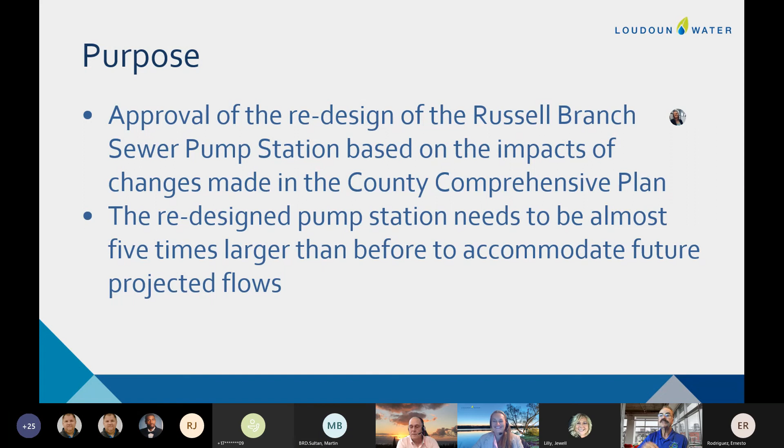Is there a question? Yeah, Kathleen, just to move things along, I think Marty and I and Mr. Bonfils have had, just kind of hit the high points, if you don't mind. Sure. I'm only saying this because I've got a meeting at 9 o'clock and I just want to make sure I get through most of this stuff. I appreciate it. Sure. Yes, and I agree. We read through your material. Thank you very much. Easy enough. All right. Then I'll try to move through this quickly.

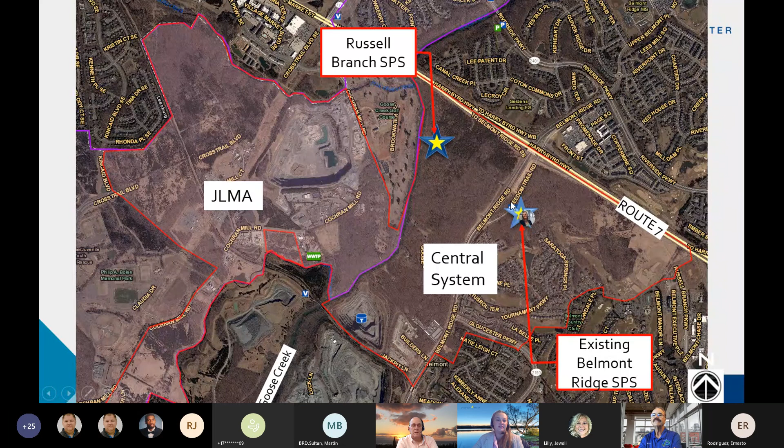So Russell Branch is basically at the corner of 7 and Goose Creek near Belmont Ridge Road. It's replacing the existing Belmont Ridge pump station. The need for the project, basically we're replacing the Belmont Ridge station because it was only built to serve the Toll Brothers subdivision, not to serve the entire shed. And Belmont Ridge is one of the oldest pump stations in our central service area, and it needs some major rehab.

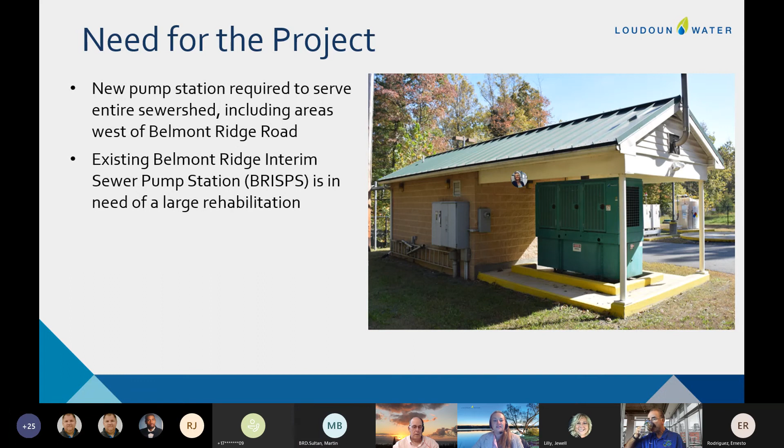So the timeline, I started this project in 2017. We started with HDR. They designed basically the whole thing 100%. Then when we were working on easement negotiation with the property owner and the county, the comprehensive plan amendment came out. So once we got resolution with the county on how we would handle the easements, we decided to put the project on hold while we developed our JLMA master plan

last summer. So once that was done, we started reprojections for Russell Branch and kind of thought through how we would want to design the new pump station to be phased to handle all the flows. So here we are in 2021, 4 years later.

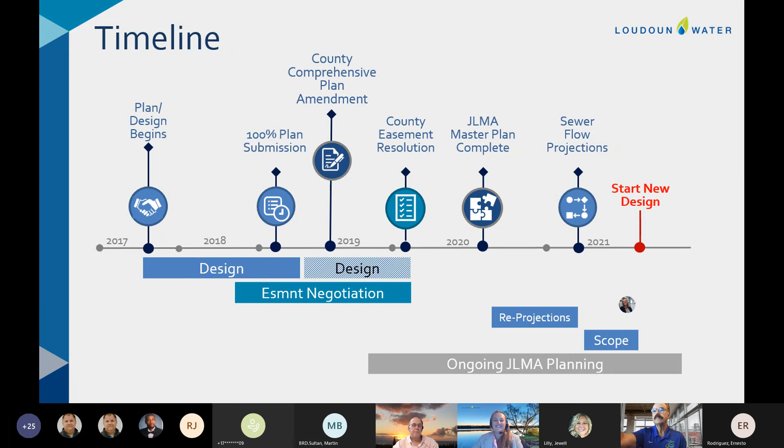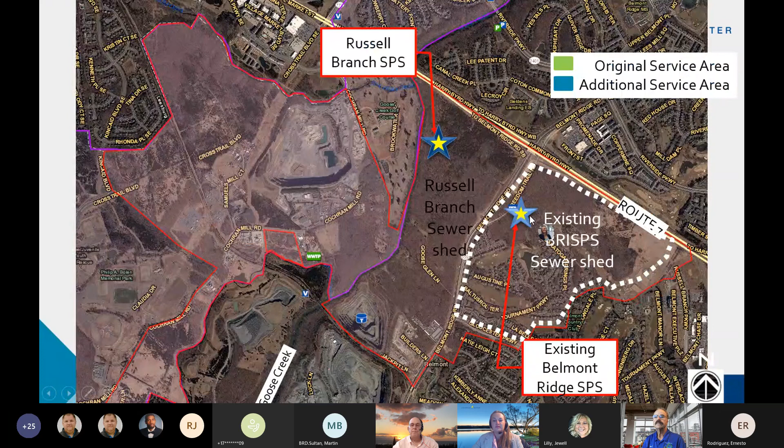So just to highlight, this white dash is the existing service area of the Belmont Ridge pump station. The green area is what the original Russell Branch sewer shed was going to serve, which is about 1 million gallons a day. And then the blue is the JLMA East area, which will also flow to Russell Branch depending on what builds out.

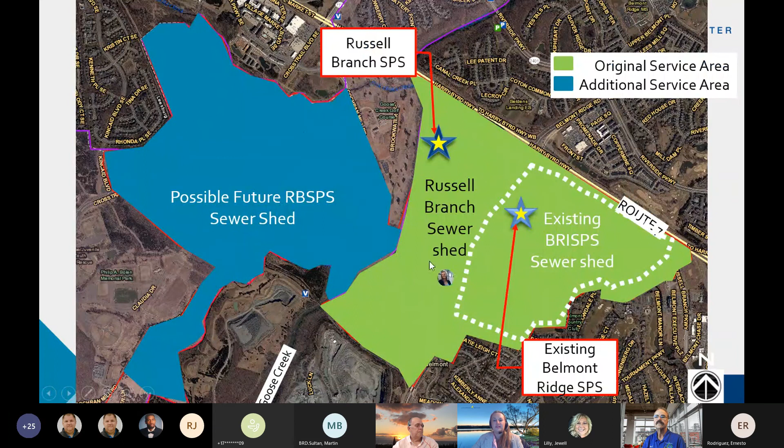So our phased approach, phase 1 is going to be close to what the original design was, about 1 MGD, which will serve that green area on the last slide. Phase 2 will serve the green area plus some of the blue. And then phase 3, the final build out, would be if everything redeveloped and all vacant properties developed and came to Loudoun Water, which may or may not happen, but we want to have the ability to serve if it does. So our phased approach will provide the most efficient, cost-effective way to give us the most flexibility.

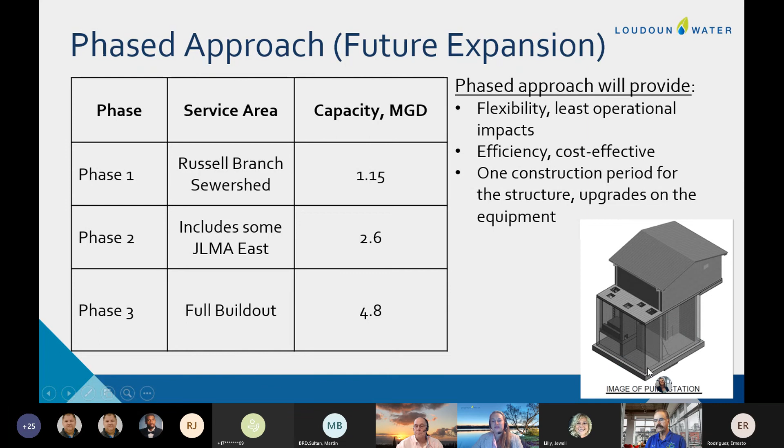So this is the original design. We tried to keep as much of the original design as we could, but unfortunately, upsizing 5 times, it wasn't a whole lot possible. So we're keeping the substructure, basically everything below ground will stay the same size, which is good, but the control building above will definitely have to change. So the scope of work includes enlarging the control building to accommodate additional panels for an additional pump in phase 2. And the panels, of course, are bigger because the pumps are bigger. And then we need a larger generator because we're going to have additional electrical load. So the generator room needs to get larger.

We're still undecided on how big we're going to build the emergency storage tank. What's shown here is 2 hours of peak flow at the ultimate build out. So it's quite a big tank, but it does fit on the site. So we're going to see if we can grade it and still not impact the floodplain.

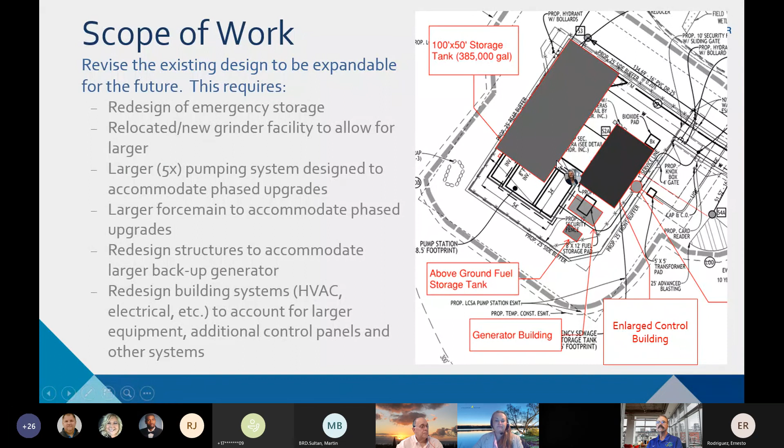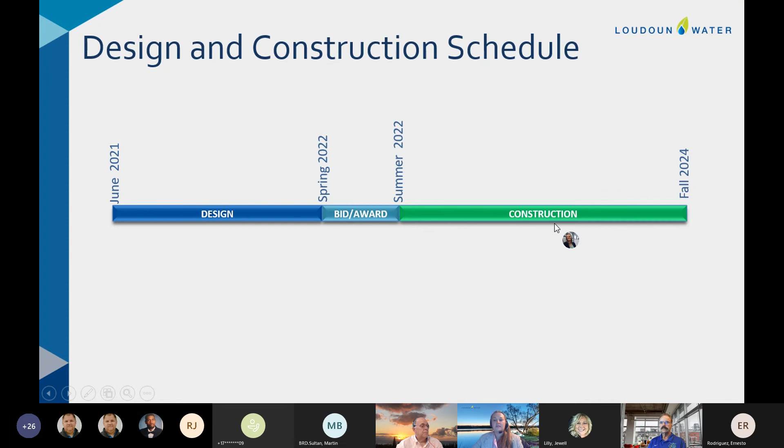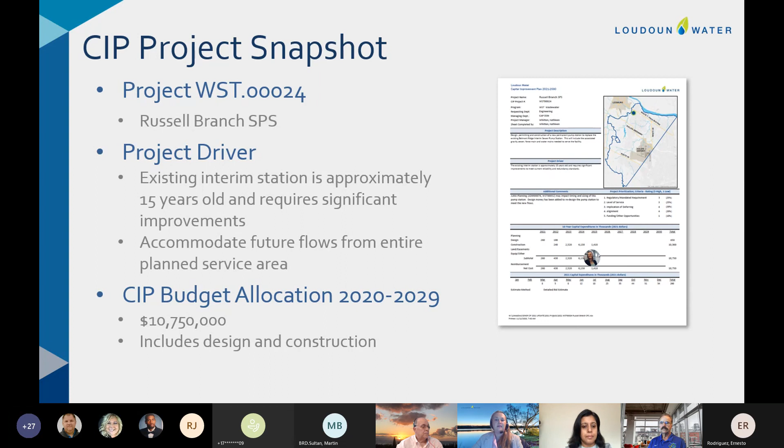Schedule, the design task order is going to take about a year. So I'm hoping to be back to talk to you guys next summer about awarding a construction contract. And then construction is going to take a little over 2 years before we can decommission the Belmont Ridge station. It's in the CIP. We've got about $11 million for the next 10 years. That's all I really wanted to say on that slide.

And then the fee. So as you can see, the majority of the fee is in design. About 2/3 of our plans need revision, a quarter of the specs. All disciplines need to be involved. Like I said, once you change the layout of the pumps, then you're changing your HVAC, your electrical, your I&C, basically everything.

Sorry, Mr. Koblis has a question, please. Sure. You're on mute. Sir, you're muted. What a rookie. Golly, you'd think I'd know this by now.

So you got this 2.8%. What is that 2.8% of? 8 million? Yeah. So if that was the most conservative, if the construction of the pump station comes in at 8 million, this would be 2.8% of that. Okay, and then the whole thing is like 4.6%. Yes, approximately. I can't remember what I put down. Anyway, my question is, how much did we already spend on design?

So previously you have approved altogether in the original design and the amendment 479,000-ish. So that'll be a total of 865,000 if you add what was previously approved and this new task order. Oh, you said we're using some of the old design? We tried to as much as we could, but we're upsizing pretty much everything. The thing that isn't changing is the below grade design. That structure will stay the same. The stairwell will stay the same, but everything upstairs is probably going to have to be changed in order to fit all the panels and stuff that we need. Okay, that's all I have. Thanks.

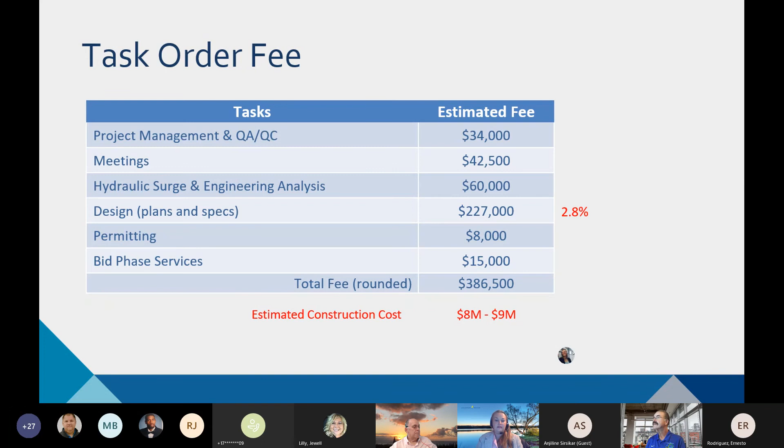So I think the only other thing I wanted to say on this slide is the PM time is about 3 hours a week. We do have to go back and get a new building permit, a new certificate to construct from DEQ, and go back to DVP for a larger electrical load. And that is pretty much it, unless somebody has any other questions.

Got my recommended motion. What is below grade that doesn't have to be changed? Mainly just the actual concrete structure. We had a grinder chamber and wet well kind of attached below grade in the pump station building itself. And so we're going to move that grinder chamber outside of the pump station so that the wet well can be basically double the size in order to accommodate the future flows. Okay, that's all I asked.

Are there any other questions? Do I have a motion to approve the recommended motion? So moved, Jim Bonfils. Seconded by me. Is that for consent, Marty? Excuse me, yes, for consent. My motion is for consent. I apologize. Yeah, that would be for consent. That's correct.

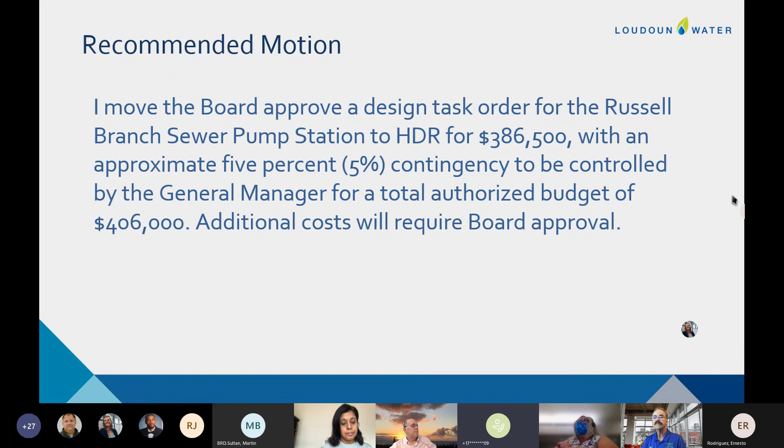Thank you. Roll call vote, Mr. Bonfils, yes. Mr. Moody, Ms. Sirsikar, yes. And Mr. Sultan. Yes. Thank you, sir. The next item is a report on the Milestone Reservoir, an update.

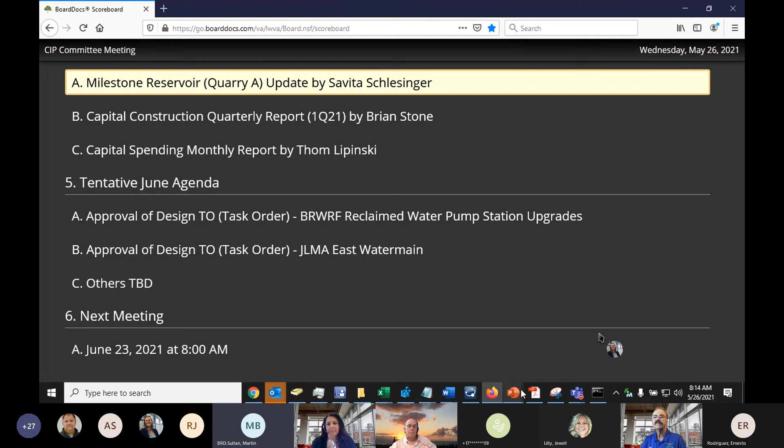Good morning, everybody. My name is Savita Schlesinger, and I'm going to give you an update on the Quarry A project. It's been a while since we've had a touch point for this project, but we've been doing quite a bit in the last few months. So we wanted to let you know about that.

Yes. Sorry, we have a question for Mr. Koblis. Sure. Thank you. Savita, sorry to interrupt your start, but if you could just tell me, because I've been on this project for 12 years, why we decided to put the pump station on the far side of the quarry, because there was a lot of question about where we were going to put it. I know we originally were going to put it there, but then they were talking about moving it again. So I'm just curious why did you finally end up with it there? If it's part of your presentation, that's fine. I just wanted to make sure you brought it up.

Sure, I will, and I can answer your question now. Right now, that is our conceptual location. When we bring the CMAR on board, it is possible that that location may change. It's something that we're going to evaluate once they get on board. So, okay, I'm going to just talk to you a little bit about what we've been doing and where we are. I'm going to go over the project background so we can talk a little bit more, Mr. Koblis, if you have some more questions, and then what the next steps are for our process. Yeah, we don't need to talk about what the CMAR process is. We all have seen it now like 3 or 4 times, so we understand what it is.

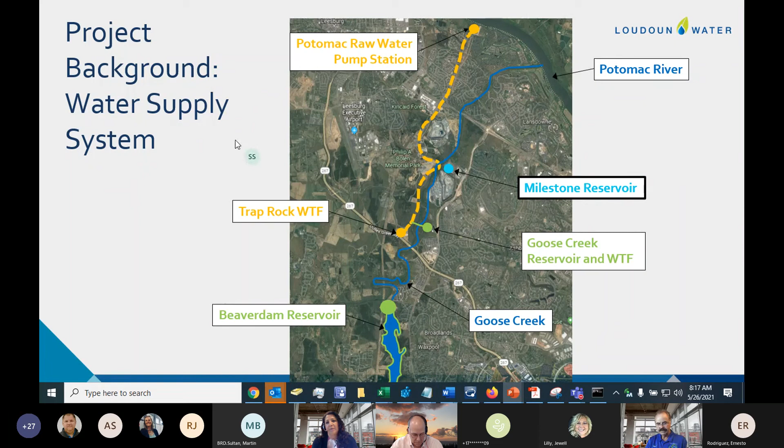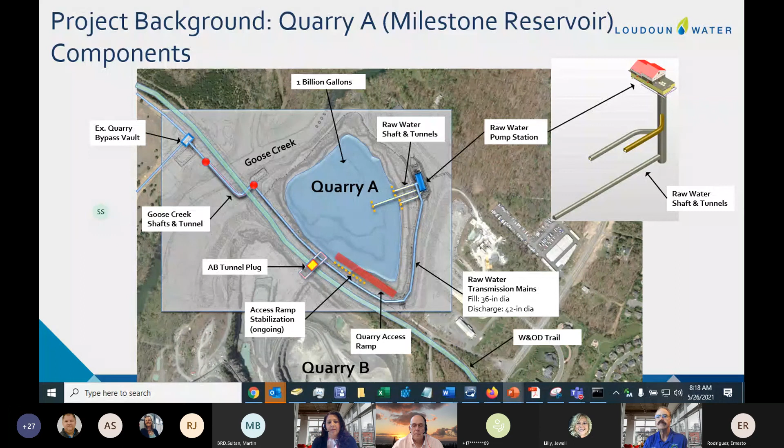So I won't spend too much time on this. Per our policy, we did have to bring a professional advisor on board to help us with this process. And now we are actually in the middle of our 2-step procurement process. The first step was an RFQ to determine a short list of contractors, and the second was an RFP to make a final selection of the contractors. And then we'll enter into negotiations with 2 or more of these firms.

So when we're all said and done, once the CMAR is on board, this is what the org chart will look like. So we have our designer, Arcadis and Schnabel, our professional advisor, Black and Veatch, and then the CMAR will also be a part of our team with any subcontractors they may bring on board. And together we'll work to find the most optimal design for our needs.

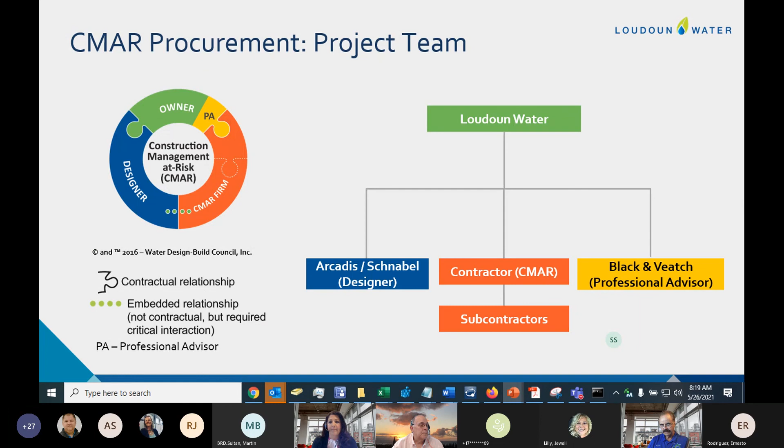So from a timing perspective, we started this process back in March of 2020. We brought Black and Veatch on board, and then in June, the board approved the resolution to allow us to do CMAR. In December, the solicitation was formally opened up to the contracting community, and in March, the evaluation team developed the short list, and we are now in the process of evaluating proposals that have been submitted in response to our RFP. We'll hope to make a selection by the end of Q2 of this year, and then bring a contract for approval and award to the board in Q3 of this year.

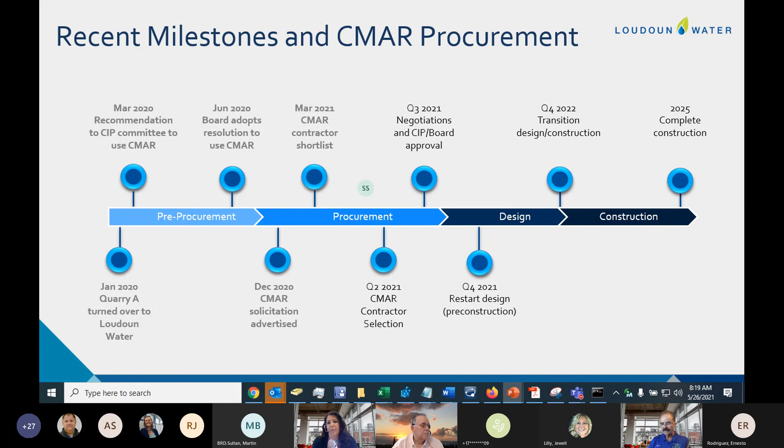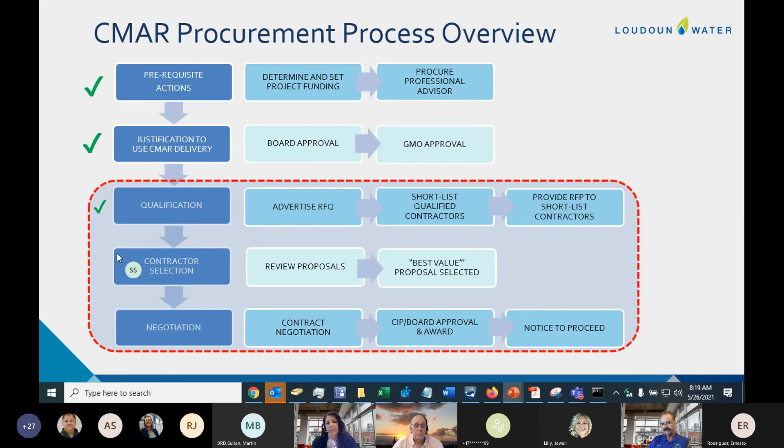So I know you guys have seen this slide a number of times, so I'm just going to walk through a few of the things that we've been working on, mostly in this red box. So as you guys know, we've completed the qualification phase of the project. We had some pre-submission meetings, we had some site visits with interested parties, and then the evaluation team received 5 statements of qualifications from Archer Western, Clark, MWH, PC Flatiron, which was a joint venture, and Ulliman Schutte. We reviewed all of those statements of qualifications, and we came up with a short list. That short list was 3 contractors, Archer Western, Clark, and MWH, and those shortlisted contractors were invited to propose on our RFP.

So we are now in this process. As part of the RFP process, we had a pre-submission meeting, and we also had pre-proposal meetings. This allowed each offeror to ask us questions, to run some ideas by us as they prepared their proposals. And then we also had one final set of site visits for the individuals to be able to see the site. We received proposals on May 4th, and those are currently under review. And then in June, we will begin our interview process. It'll be a 3-hour interview with each of the offerors. After that, we will take the performance of the interview and the scoring on the RFP, and we will rank the offerors. Once we've established the ranking, we'll then enter into negotiations with our selected CMAR. Are there any questions on this?

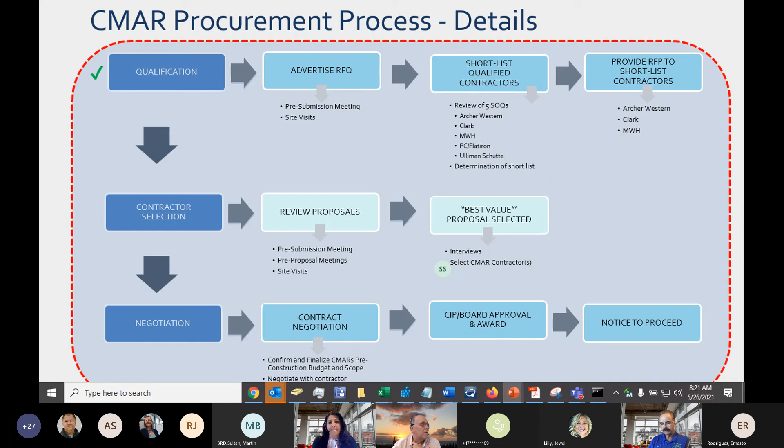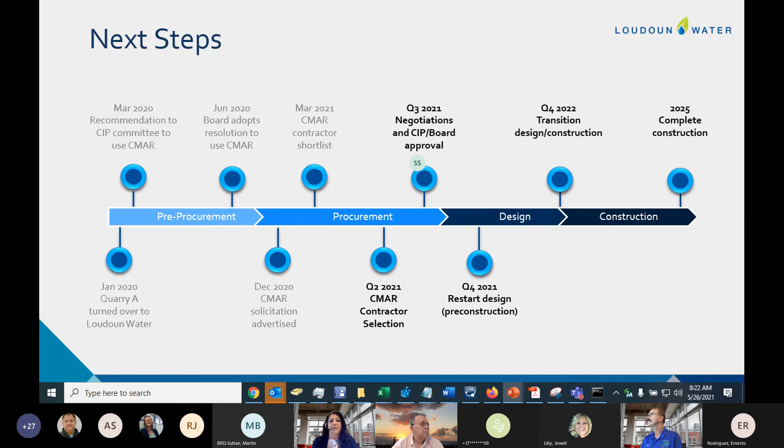Okay. So once we've made our contractor selection, we'll proceed with negotiations. The negotiations will be to finalize the design scope and fee for the CMAR, and then we will bring that contract to the board in Q3 of 2021. Once that contract has been approved, we'll resume design and transition into construction, anticipating construction to be complete in 2025. Any questions? Great. Thank you.

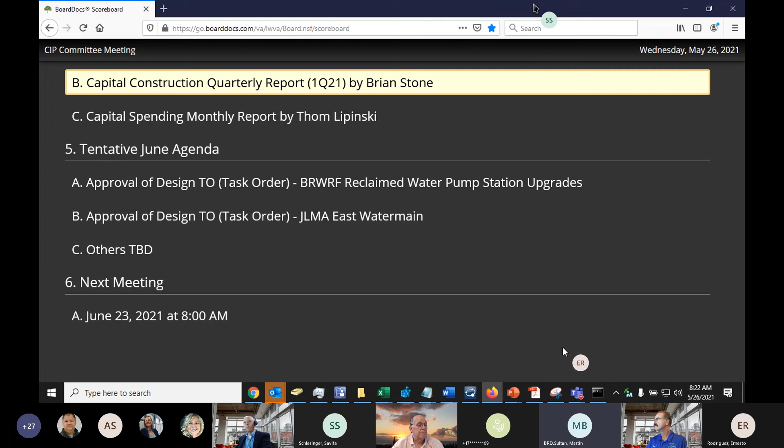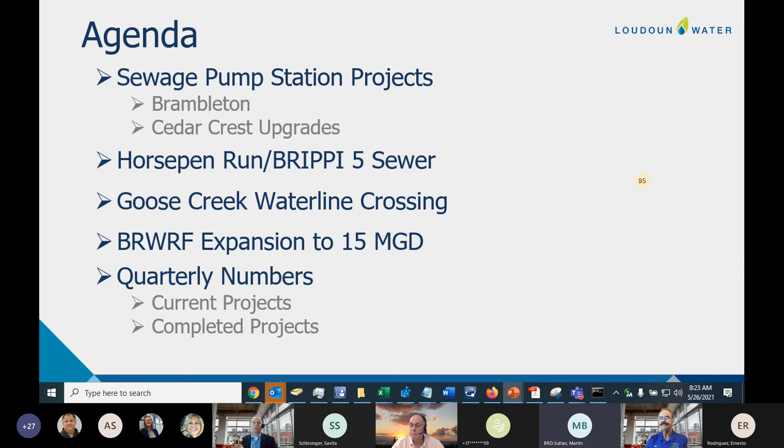Well, let's proceed to the next item, which is the Capital Construction Quarterly Report by Brian Stone. Good morning, Chairman, committee members. I'm here to present the first quarter report for 2021, the capital construction report. I'm going to be speaking about 5 separate projects today. I've got some photographs for some of these, and for others I just have general information. And then I'll close the report with quarterly numbers for those projects that are still in construction, and also some projects that were completed during the first quarter.

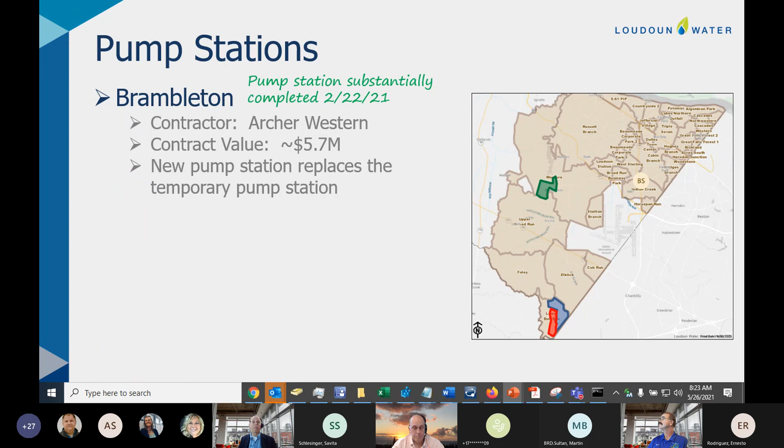The Brambleton Pump Station, the sewer shed for Brambleton is shown in green. It's in the very center of our central sewer system. Our contractor there is Archer Western. That's a $5.7 million construction project. This is a new pump station that replaces the temporary pump station that had been in place for several years. I'm pleased to report that that pump station was declared substantially complete at the end of February. And at that time, our operations and maintenance staff began operating this pump station, so it is in use now.

The Cedar Crest upgrades: at Cedar Crest Pump Station 1 and Pump Station 2, both of those pump stations are being upgraded. Those pump stations are in the very southern end of our central sewer system, as shown in the red and the blue at the bottom. Again, Archer Western's our contractor here as well. This is a much smaller contract at $1.6 million. For this project, we're replacing some equipment and making general upgrades. Cedar Crest 1 was declared substantially complete at the end of March, and Cedar Crest 2 in early April. And both of those pump stations being substantially complete are now under our operation and control. Any questions about our pump station upgrades?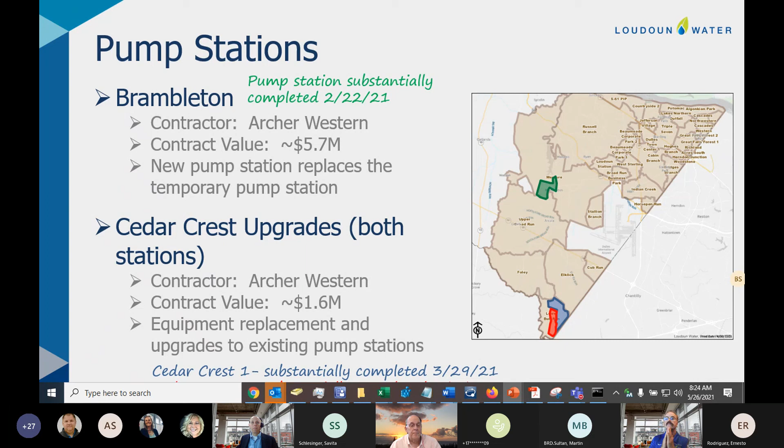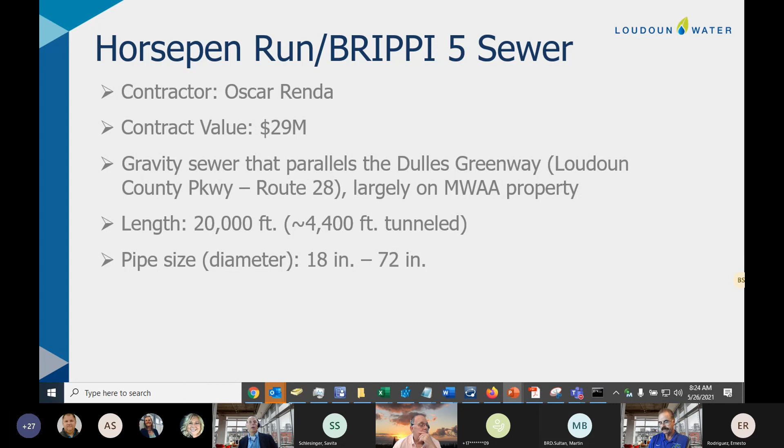Okay. Thank you. The Horsepen Run BRIPPI 5 sewer project. Our contractor is Oscar Renda. They're out of Roanoke, Texas. That's a $29 million construction project. That's the largest non-plant project Loudoun Water has ever undertaken.

This gravity sewer parallels the Greenway from Loudoun County Parkway all the way to Route 28. In fact, there's a tunnel under 28 where it ties in to the sewer there. This is almost 4 miles in length, and of that 4 miles, approximately 4,400 feet of the project was put in through a tunnel boring method, not an open excavation, but actually tunneled in.

At the low end, there is some 18-inch gravity sewer on this project, just a little bit, but at the downstream end, the sewer is 72 inches in diameter, where it ties in. This entire project has been declared substantially complete. You may recall that last summer, a portion of the work was declared substantially complete and was under our operation and control at that time.

The entire project is now substantially complete, and we hope to close it out here by the end of the second quarter. Congratulations, Brian. Thank you. I know the contractor's working on a big punch list. It's huge. And a lot of coordination with the airport, MWAA, and then the TRIP II, and then not the Greenway, but the Metro Rail. So this is a really big milestone for us. Any questions?

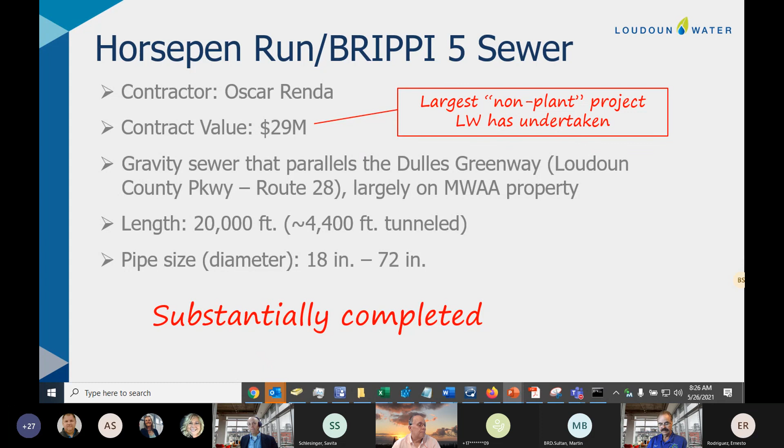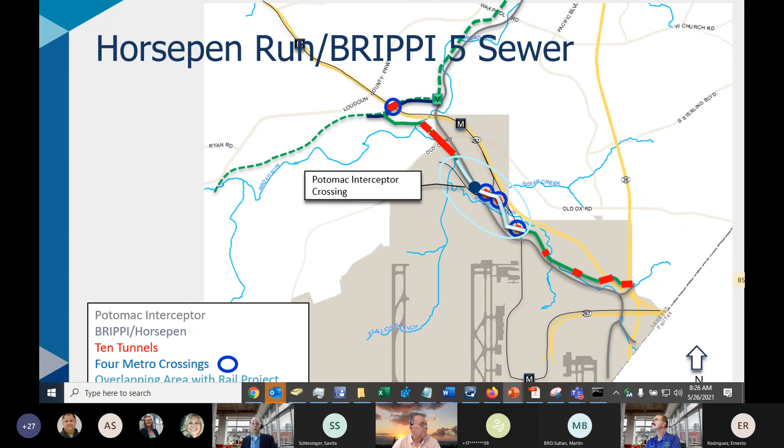The Goose Creek Crossing, Garney is our contractor for this project. It's roughly $4.3 million. This is marine construction, which is the first time we've done that. The project is constructed with a barge, and we even have scuba divers working on this project. To put the pipe across the Goose Creek, we had to dredge.

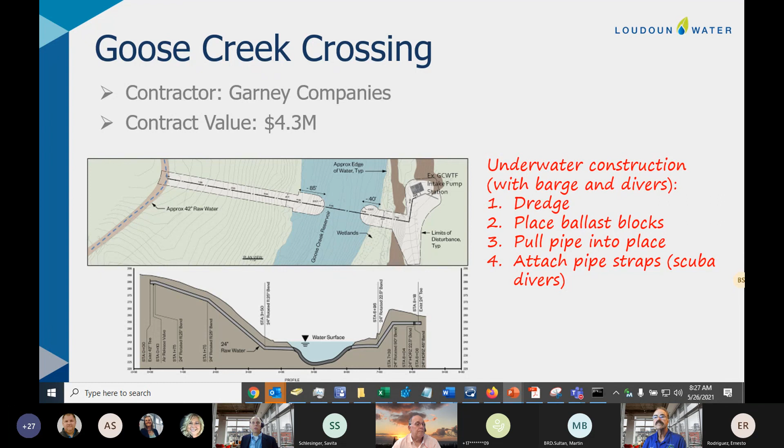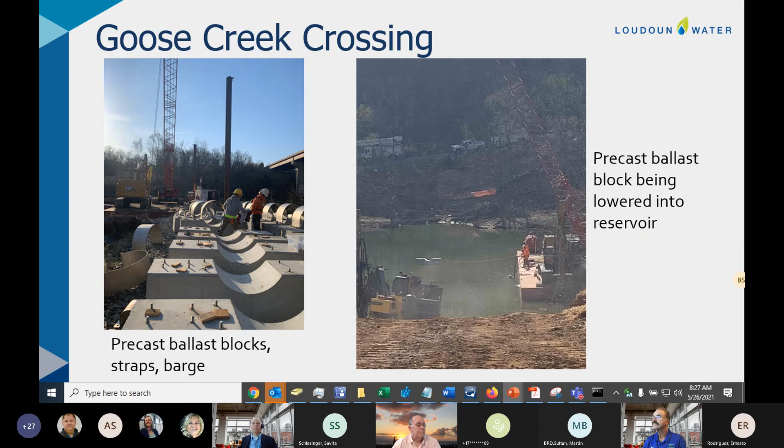Any questions? Go ahead, Mr. Koblis. You're on mute. Oh, I can't believe it.

What are those straps made out of? Are they stainless steel, or what are they made of? Stainless steel. Okay.

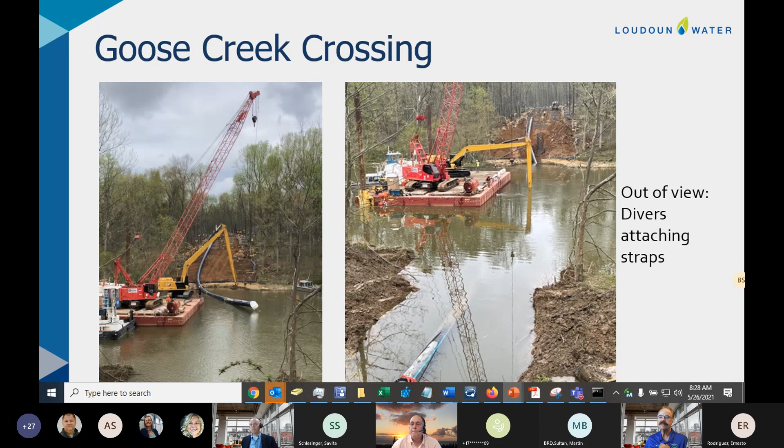All right, I'm going to talk a little bit about the Broad Run expansion. There's some key information here. Our contractor is Corman Kokosing out of Columbus, Ohio. This is a $76 million project. To date, through the first quarter, we'd had $37,000 in change orders. The value completed is at 10%, and the time elapsed is 16%.

Presently, the contractor's schedule is still showing timely contract completion. And in future reports, I'll include a schedule performance index, which will be the earned value divided by the planned value of that work. Any questions before I move into the photographs?

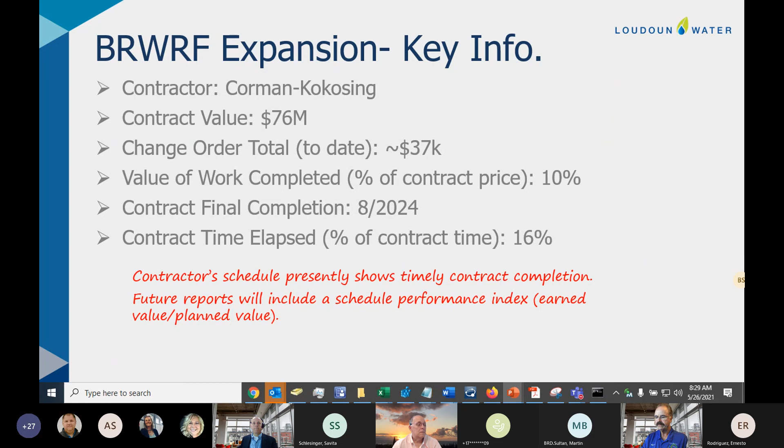Okay, before we get to the photographs, I do want to present the risk register from our June CIP meeting. I wanted to just tie this risk register back to how things are now, the status now compared to the risk that we had identified at that time. We had a risk of delay claims, compensation claims, continuous operation at Broad Run, failure to comply with contract requirements, and those status, everything's going really well so far.

We had very few time claims. We did extend some time for one of the milestones, but it did not result in an overall contract time extension. Compensation claims, as I told you, we're at $37,000 in change orders. We're able to resolve those issues quickly and proactively.

We're maintaining continuous operations at Broad Run, which is especially important for us. We're continuing to meet our permit. And I'll show you in the next slide where the contractor's working across the site. Any questions?

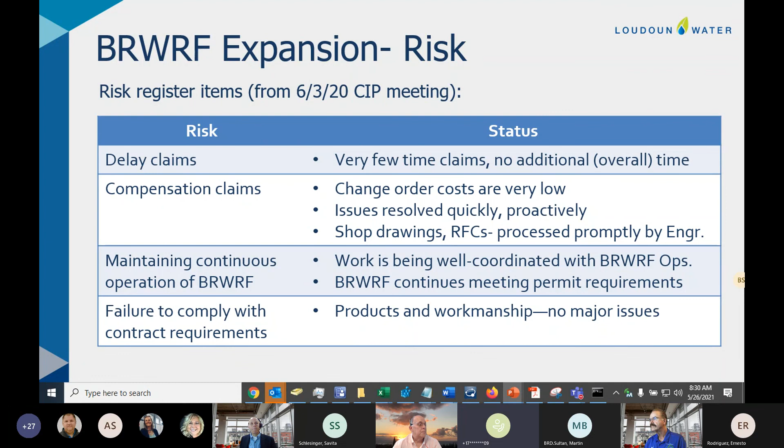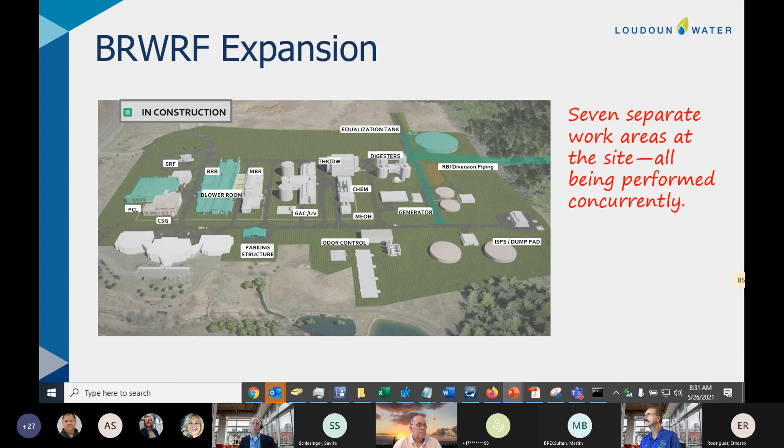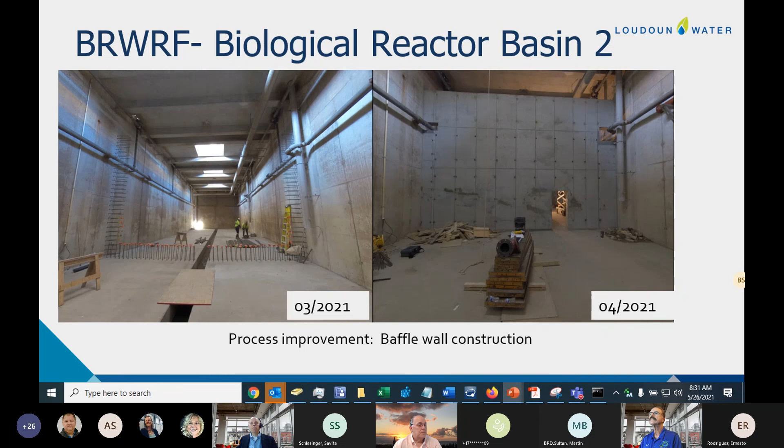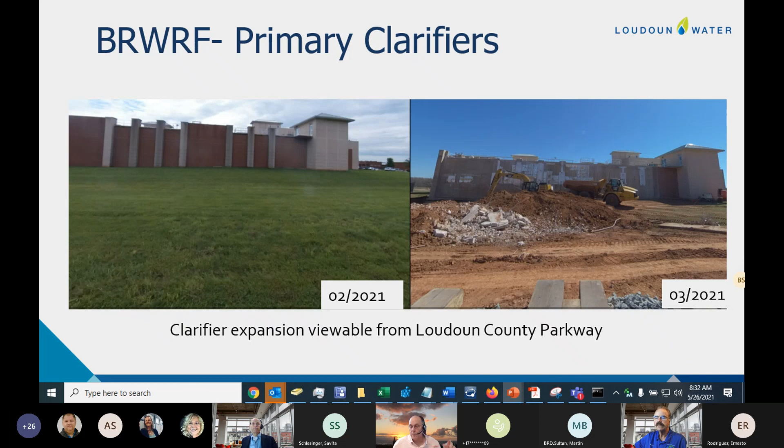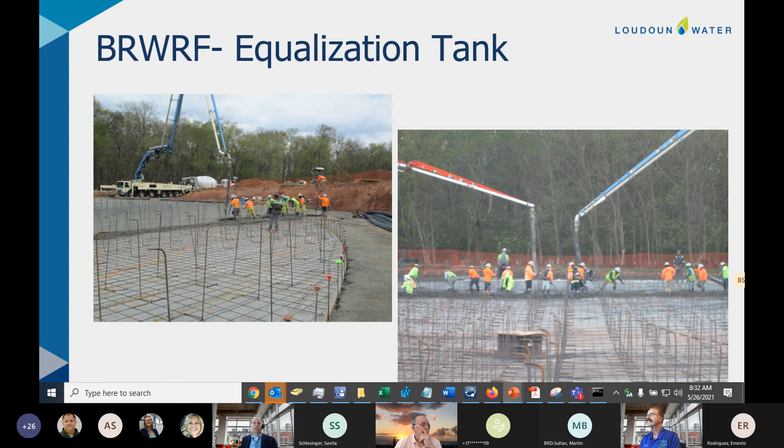And I've got 2 photographs here from our equalization tank construction. This is 240 feet in diameter concrete construction. This is a 10 million gallon storage tank. And these photographs were taken in mid-April. And I've got some details about that particular concrete placement in the next slide.

So this entire slab, all of the concrete for this slab was placed on April the 17th. That was roughly 150 concrete trucks going in and out of the site from 2 separate plants that Titan Concrete operates, the one in Leesburg and the one in Sterling. The slab is from 3.5 to 30 inches thick.

So the contractor began this work on Saturday morning at roughly 4 or 4:30 with some setup, and finished a little before 6 in the evening. And the value of that work performed on that Saturday was roughly $500,000. So that was a very productive day. Any questions?

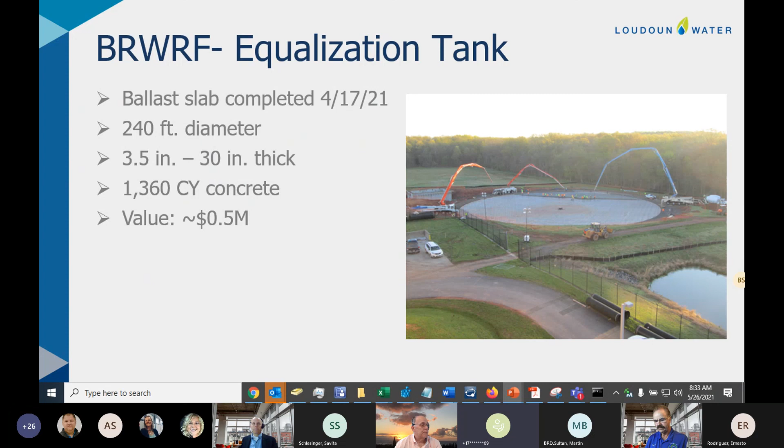Okay, I'm going to close with some... A tour? I'm sorry, what's that? Jim, I'm looking forward to a tour. Yeah, okay, we can arrange that.

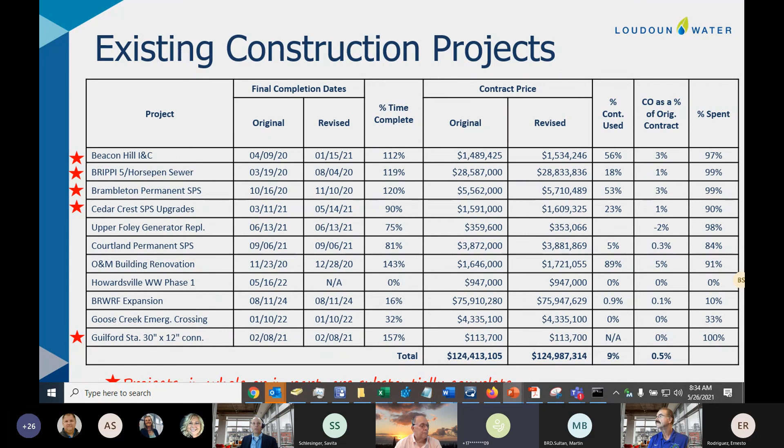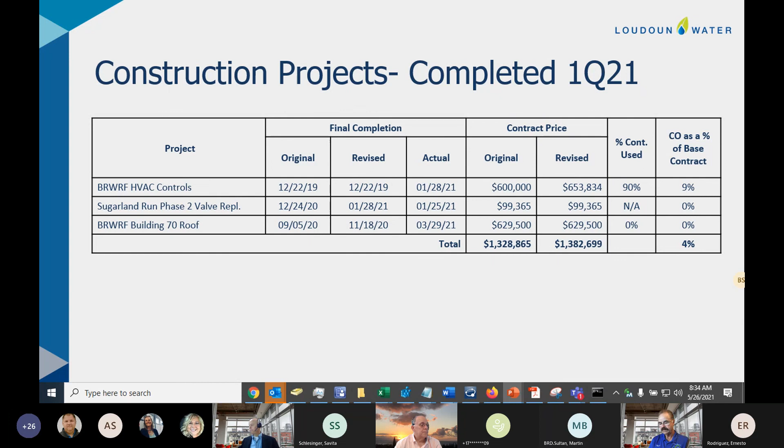Okay, in the first quarter, we achieved final completion on 3 of the projects. And those projects are listed here: our HVAC control project, Sugarland Run Phase 2 valve replacement, and then the Building 70 roofing project. Any questions about these projects? Or about the report? That's all I have for you.

I have a comment. As usual, it's a very impressive report. You guys do a damn good job. Thank you. Great job, Brian. And congratulations on the project that you had with the Dulles Town Center Parkway. It was a very great presentation. I don't have any questions for you. Thank you.

If there are no questions, let's go on to the capital spending monthly report by Thom Lipinski. So the report is there. If there's any questions, be happy to try to answer them. Thanks to Brian and his construction projects moving along, we're spending pretty close to where we projected. You're gonna end up spoiling us with a good follow-up on construction costs.

Mr. Bonfield has a question. Yeah, when I reviewed this, it looks like we're tracking right on line with ERCs and everything. Do you believe that will continue for the balance of this year?

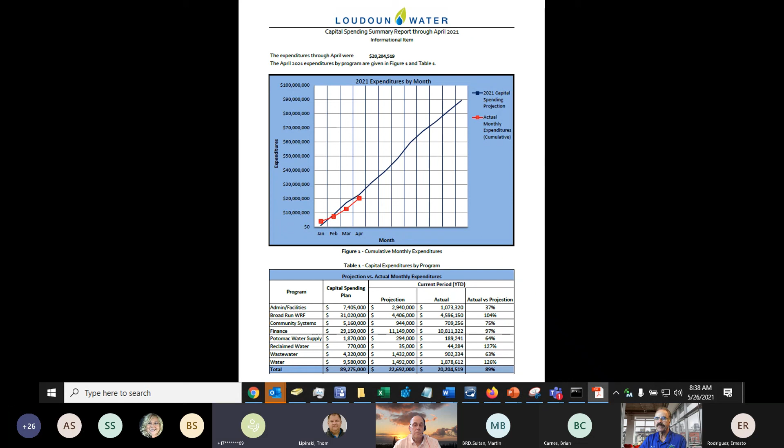Thank you very much. You're welcome. Thank you, Brian. Are there any other questions? Well, thank you. Mr. Koblis has a question.

Yes, just a comment. I know these people are on the line because I can see their names up here, but first of all, I just want to say how great it's been working with Roddy Moe. I've been with him for 12 years now, and I've never been able to shake him up in a meeting, so that goes to say what kind of person he really is. He's always had my back, always explains things. You probably don't know how much he and I text or talk outside of our meetings just to get clarification, so I don't have to bring it up in the meetings. It's going to be a sad loss for me for sure. But I talked to him yesterday, and I know he's got some great plans for his future, and I'm sure we'll see each other down the road.

Also, congratulations to Alton Eccles for being the new DGM. That's a great place for him to be. I fully support it. Alton's very good at keeping an even keel in all these meetings and very, very knowledgeable. And also congratulations to Pam Kennel for her promotion too. I just wanted to bring that up, because all these three people are very important to this committee meeting. After chairing this committee for, I don't know, 8 or 9 years, they all helped me a lot, and I really appreciate it. And I thank you all.